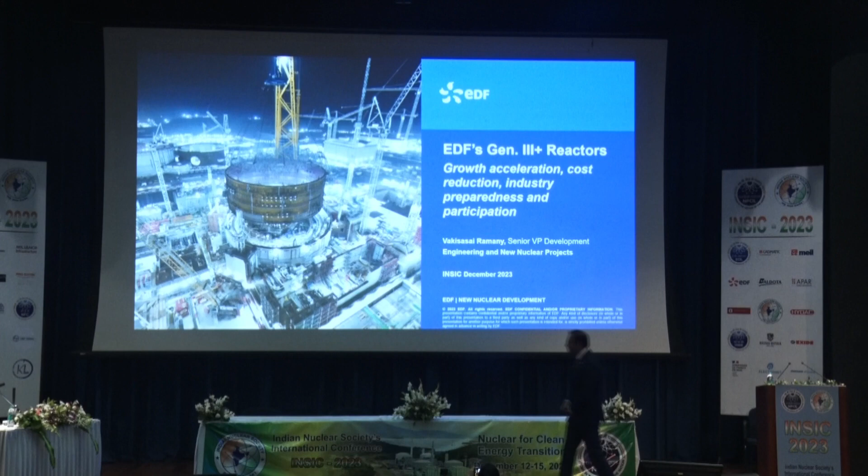And share humbly a bit of our journey in nuclear, which has been lasting for more than 50 years in EDF, and which we expect to continue for many decades. I'm sure you've shared here all the positive perception of nuclear, which is back in the game now, in the center of the game with the COP28. And so I think we all have to play a big part in this, and we look forward to getting India accelerating and showing the world how fast and great nuclear can be for the future of this country.

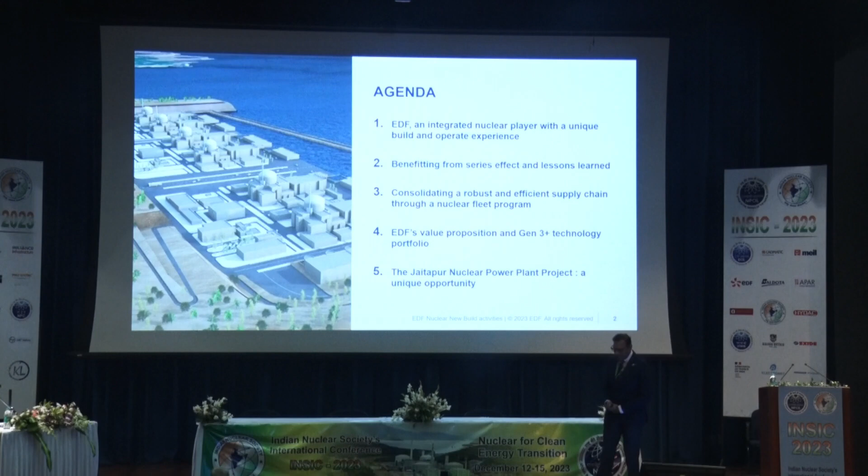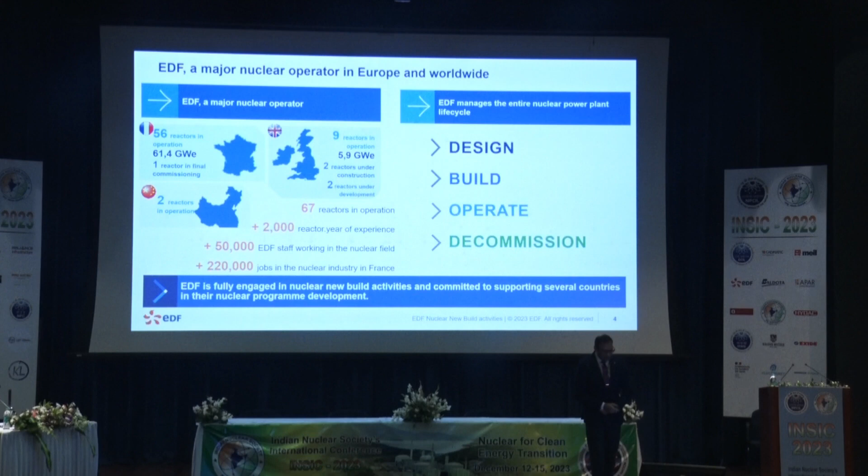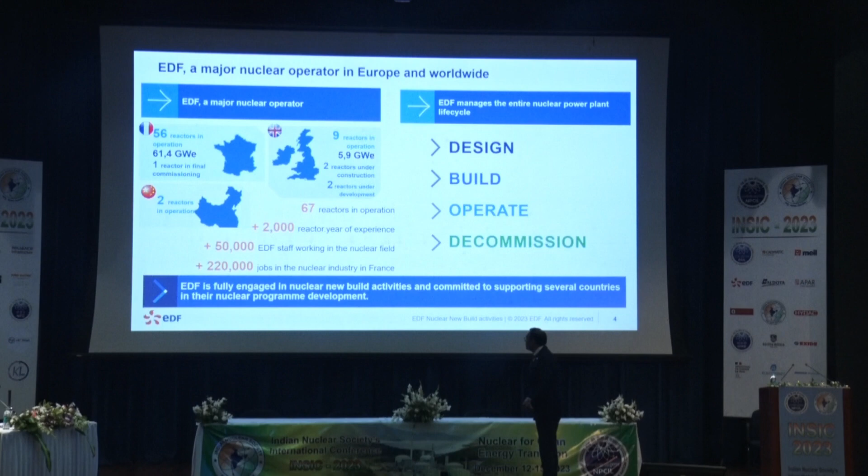So maybe you've been very kind, sir, in saying that EDF doesn't need introduction. Still, I will maybe explain where we come from. Today, EDF is, as a single company, the world's largest operator. I think probably in some years we will be overtaken by some big Chinese company. That is to be expected. But so far, we are the largest world operator as a single entity.

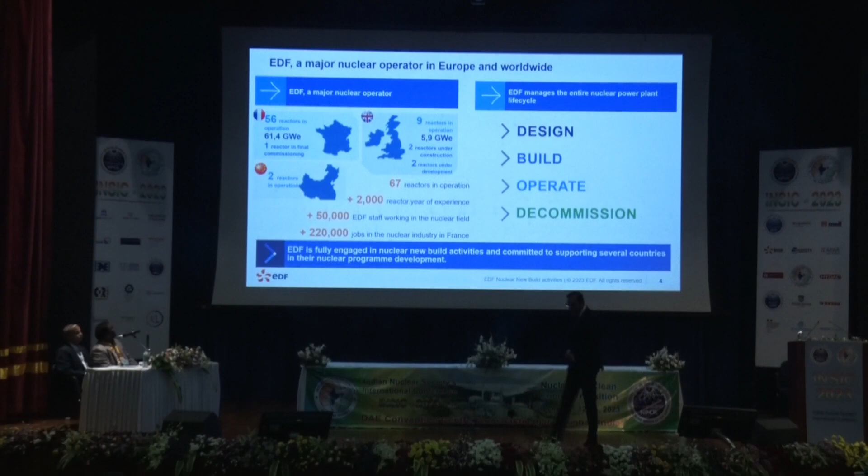We've got 56 reactors in operation in France, 9 reactors currently in operation in the UK, and we do contribute to the operation of 2 reactors in China. We count our experience, just like we all do, in terms of reactor years. So we multiply the number of reactors by the number of years of operation, and that gives us more than 2,000 reactor years of experience, which means that a country like the Netherlands, which has 1 power plant, would take 2,000 years of operation of that single plant to get to the same level of experience. That is not to compare, but essentially to say how much there is to learn.

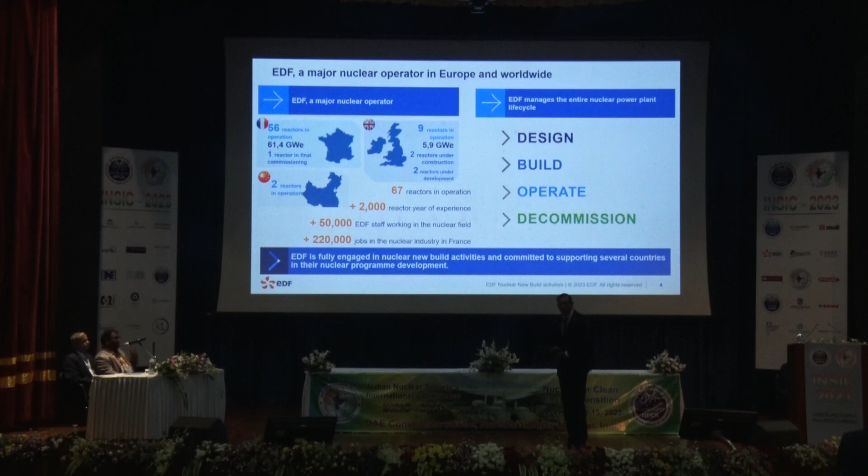And you probably know, we have been through very difficult phases and experience last year with our fleet. And I think this is a reminder that whichever stage and maturity of development you are in, nuclear is humbling as a whole. So we are present with all this experience in design, build, operate, and decommissioning today. So we are present in the full value chain of nuclear.

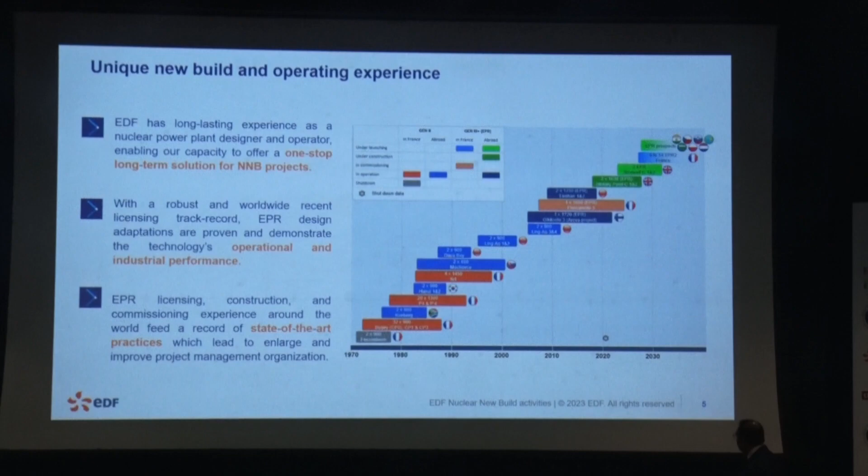How did we get there? It's been a long history, and I think it's best pictured by this graph. We started in the 70s based on two things that happened. There was the oil shock. France is actually geographically a pretty small country and didn't have any natural resources. So the government had to take dramatic action, and they took one bold decision to build significant nuclear capacity in France. It started with Fessenheim with 2 900 megawatt reactors, and then we had 32 additional reactors of the same kind being built in France.

It's fair to say that these decisions were made before having a clear picture of how much it would cost and how much capability we had to mobilize. This is a very important element. So the one thing, and I was sharing with my good friend Mr. Arun Naik earlier, one big difference I would say between France and India is that the decision-making process involves a go decision before you have all the parameters of the program. This is true also today.

As we launch a 6 EPR program, the decision is made before we have the full cost and all. But the industry then gets prepared and comes up with a full proposal aiming to be the most economical at the end of the day. In India, there is a logic to challenge the industry through the process and then make a decision. Comparably, through this process, we get to a significant number of reactors built in France. Comparatively, let's say, maybe India could look at other ways and other processes. This is just food for thought for the rest of the journey.

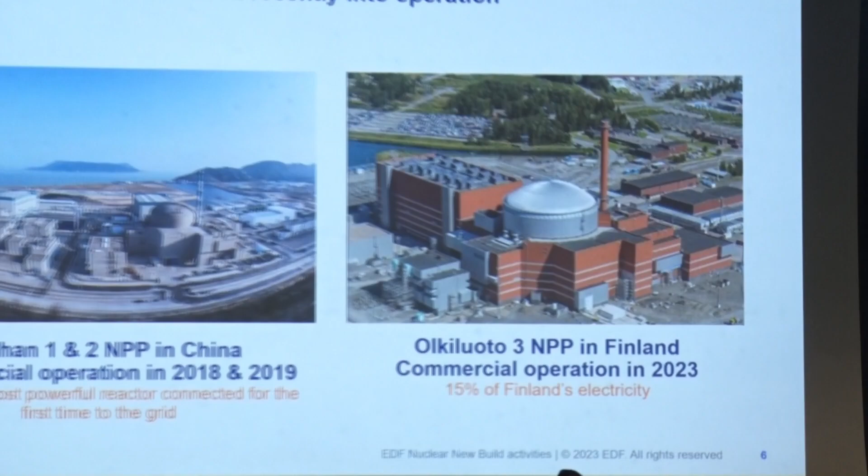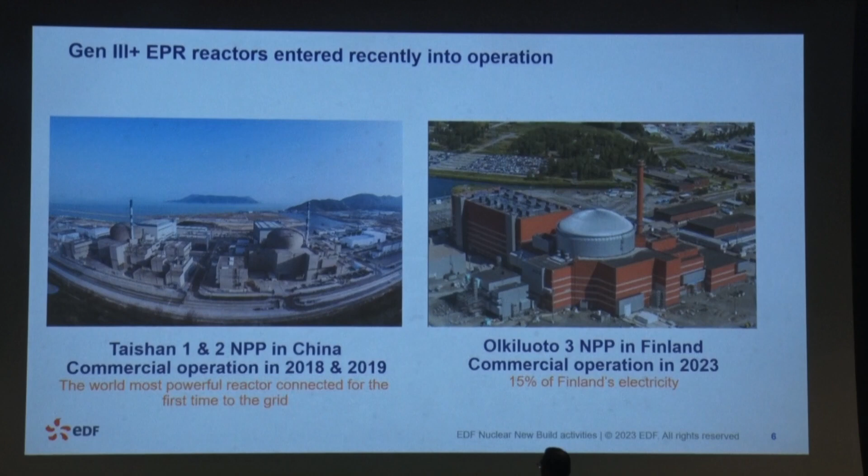We are, I would say humbly, at the beginning of this journey, not even in the middle, but we have great hopes to improve this situation. This is what we have achieved so far. I would say not easily. So we have many of our own scars on these programs, but we have completed the Taishan program in China, and we have successful operations for 2 EPR reactors of generation 3 plus today. Both of them are up and running nowadays.

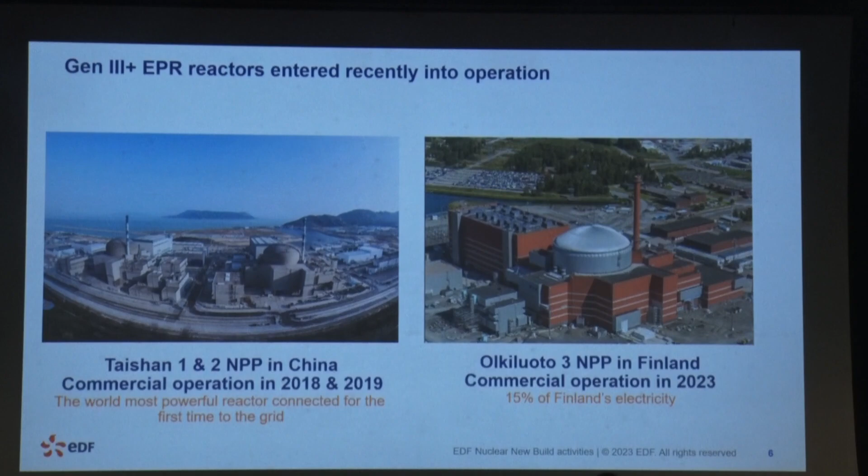Finland, Olkiluoto 3, finally now is up and running. It's difficult to compare the situation. This was meant to be a single unit, not a twin unit, which in its own right is part of our lessons learned. We would avoid single unit programs, and rather encourage at least twins and even more to have a significant program effect.

And Olkiluoto today is providing 15% of Finland's electricity. For those who don't know Finland, Finland is a very industrial country with a lot of high power intensity, power savvy industries like paper, and also metal and all other related industries.

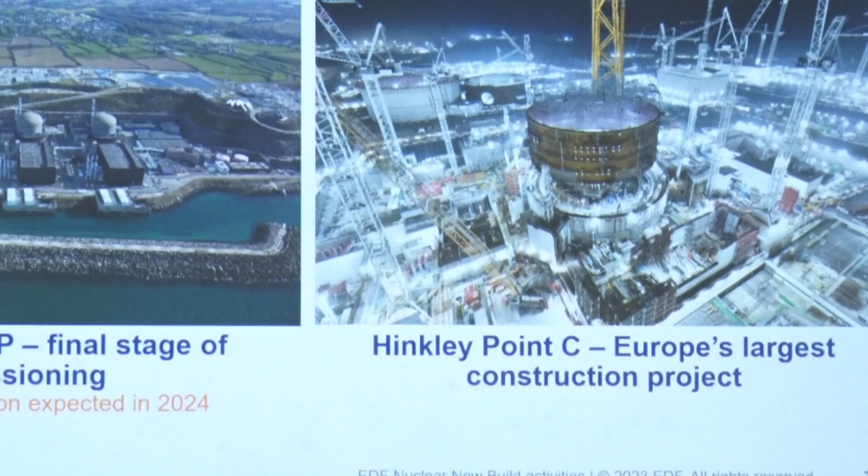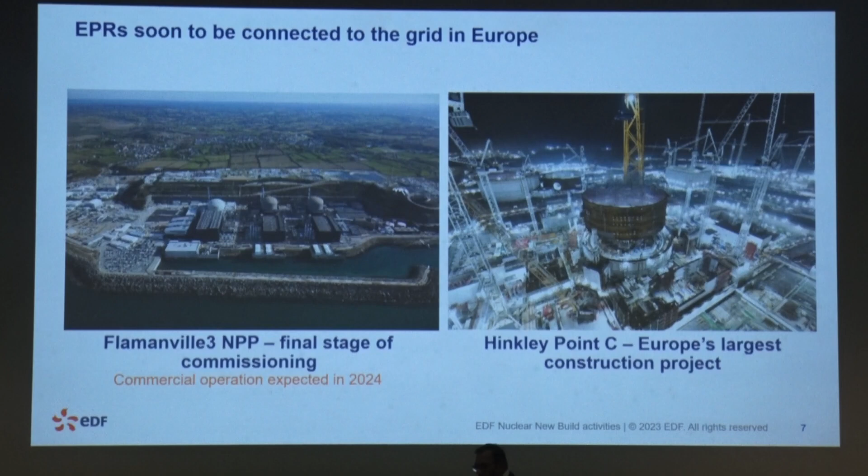In France, we are very soon to complete the Flamanville 3 EPR program. This was another single unit program which we definitely don't want to replicate. We're going to go for series. So here in France, there are 3 reactors on the site. These 2 are reactors of generation 2, and Flamanville 3 is here. This is the generation 3 plus reactor. We expect to fuel load early next year and get into commercial operation in the course of next year.

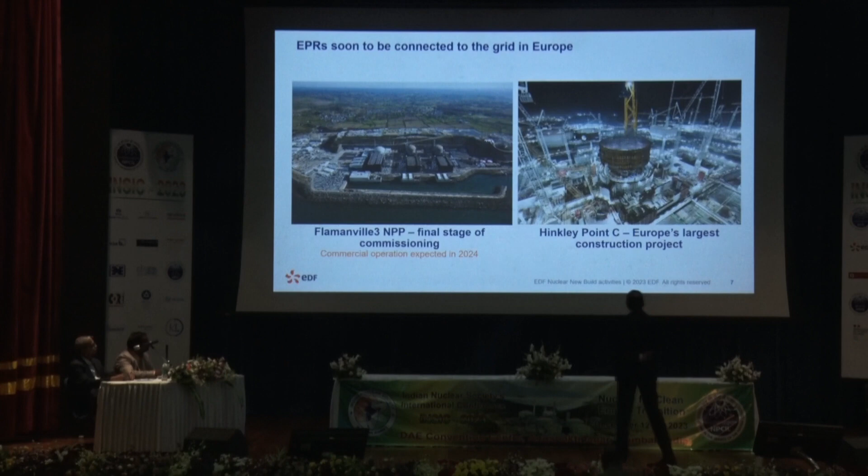What you see here is a picture that dates almost a year, of Hinkley Point C, which is the construction of a twin EPR in the UK. What you see in this picture is the liner being installed through actually the biggest crane in the world, which we have installed there, which we call by its nickname Big Carl. You can see it in yellow here.

In this project, we have performed a lot of prefabrication through our experience learning. I will come back to that, which has allowed us to completely integrate lessons learned from previous programs and accelerate construction. I don't have the picture here today, but we are to put the dome by the end of this year. So this is in a few days. The dome of the reactor will be up there. So that's to give you a picture of who we are and where we are today in generation.

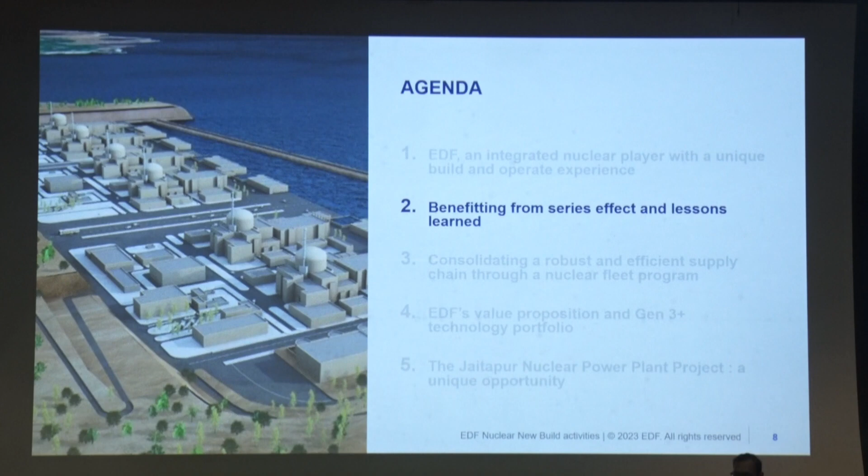Now, of course, the objective, because this is the theme of the presentation, is how to grow, reduce cost, do it successfully, repeat. So, two aspects I'm going to develop in the next section. One is related to the benefit of the series effect, how important it is to have visibility on a program to be able to plan and ensure that things can improve over time. And second, of course, to make sure that this happens, specific processes related to lessons learned. So, a bit of the theory which is verified by experience.

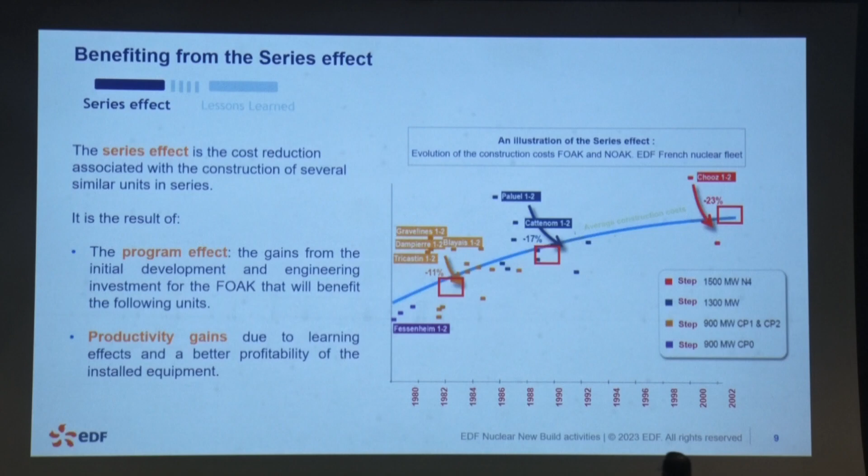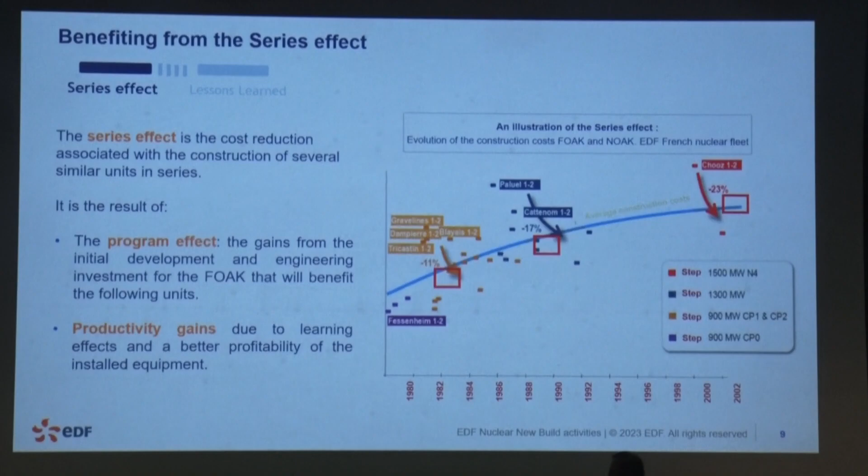So this is the curve of how things have evolved in France, and how we've seen the construction cost evolving over time. Of course, what you can see here is a progressive increase, but at the same time there's quite a lot of variability, and also it's not linear, and you manage to actually get to a point where things can be fully put under control. Now, why does this go up? It's because we're moving from generation 1 to generation 2, and the level of complexity increases significantly.

But the reason we managed to get some improvements in the numbers and the learning is that first we make sure that we benefit from what we call program effect. So we plan as a program, we can procure as a program, we can leverage engineering and developments across a fleet, and secondly, of course, there is learning through productivity, and this is something which I would say is by the book, something that you would see everywhere.

Maybe some concrete numbers. If you look at the program effect, and we now consider the program not on a single country basis, but on a worldwide basis, when we compare Olkiluoto 3, which is the first EPR which started construction, with Taishan, we've been able to cut the number of engineering hours by 60%.

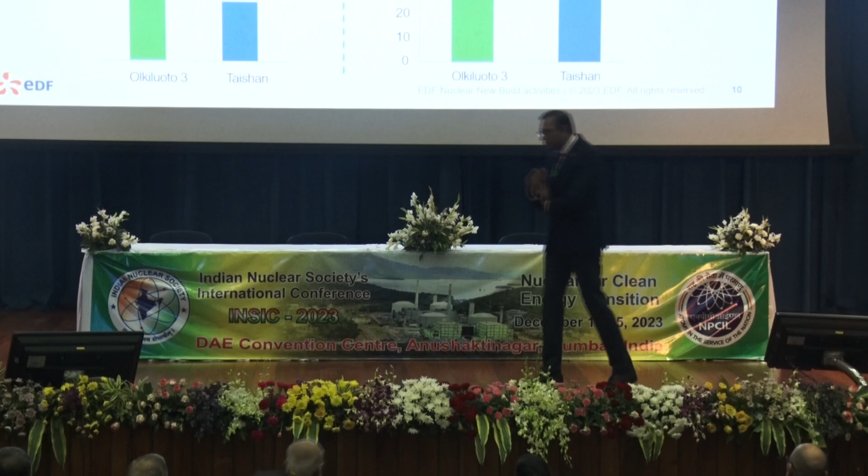This is the capability of using a number of detailed design elements in the drawings of Taishan. Manufacturing itself as well, Olkiluoto 3 could be considered the first of a kind. And when you look at steam generator manufacturing, we have been able to cut the manufacturing duration by 2 years from one program to another.

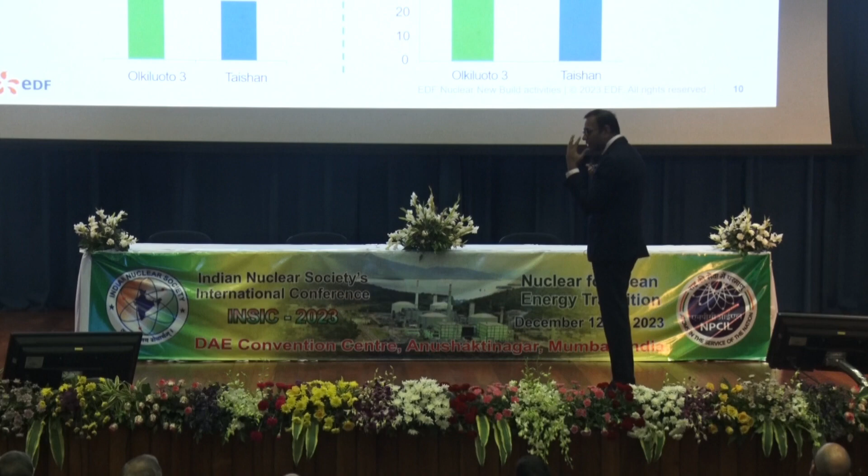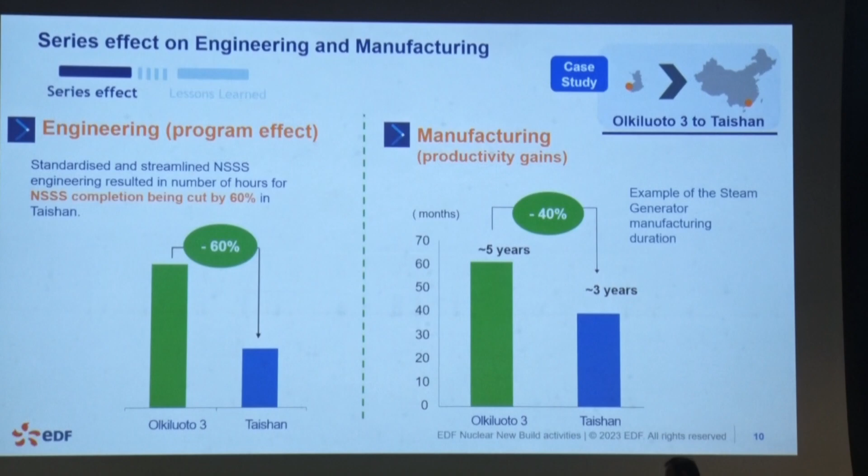And this is important in the sense that, bear in mind, this is just the beginning of the journey. We're very far from having fully industrialized all these processes. The reason why is currently, when you look at the different EPR programs, the first EPR was decided for Olkiluoto in 2003. The second then for Flamanville was decided in 2004, but the pouring of the concrete was in 2007.

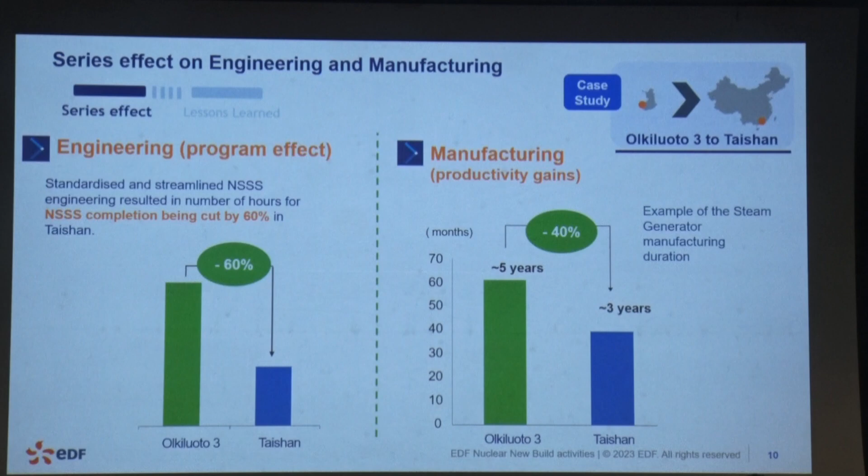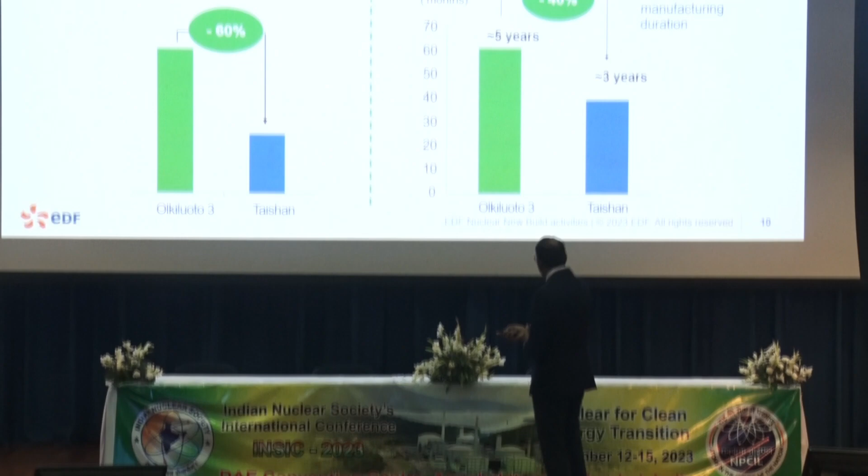And Taishan was decided in 2009 and pouring of the concrete the same year. Then we had a huge gap, and we had to wait until 2016 to have Hinkley Point C decided. And so those significant gaps didn't allow really the industry to fully organize itself. So lessons learned have been happening, and we can show these numbers, these figures, but we don't have the full effect of those yet.

And this is why, considering the future of the nuclear program in France, we're encouraging the government, and the government has decided to make a 6 EPR program decision in one go, and that was decided in February 2022. I'll come back to that. Series effect, other examples, replicating the design. This is going to happen in the UK. So the Hinkley Point C design, for which I've shown a couple of pictures, that design is going to be replicated exactly at Sizewell C.

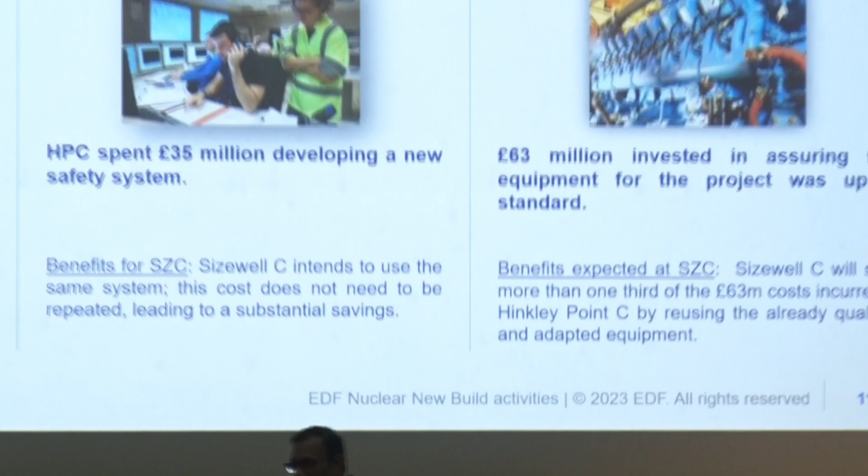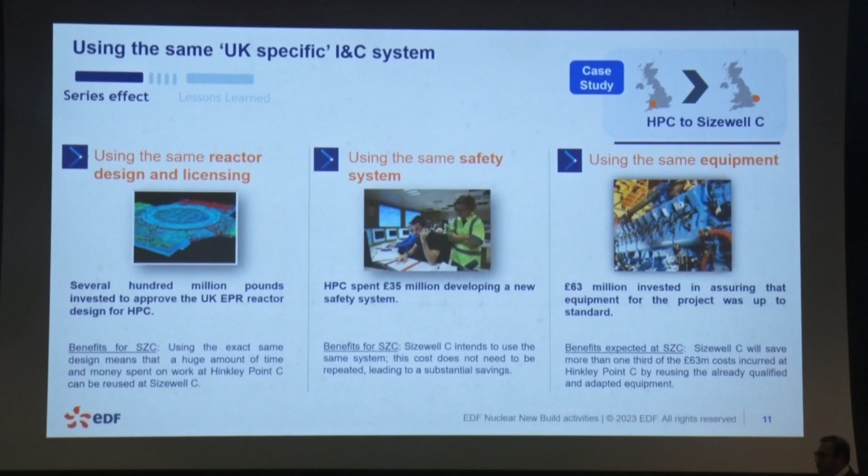Because the UK has its specificities, it's got specific design elements, just like India AERB is requesting some, or say AERB rules require some adjustment. We have seen the same in the UK. Those do have a significant cost, and in the case of the UK, that was several hundred million pounds. And of course, being able to completely leverage that for a second program is very beneficial.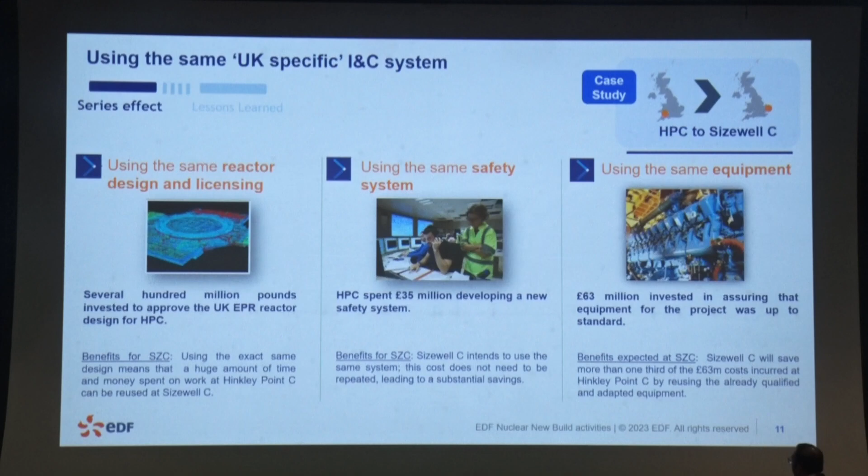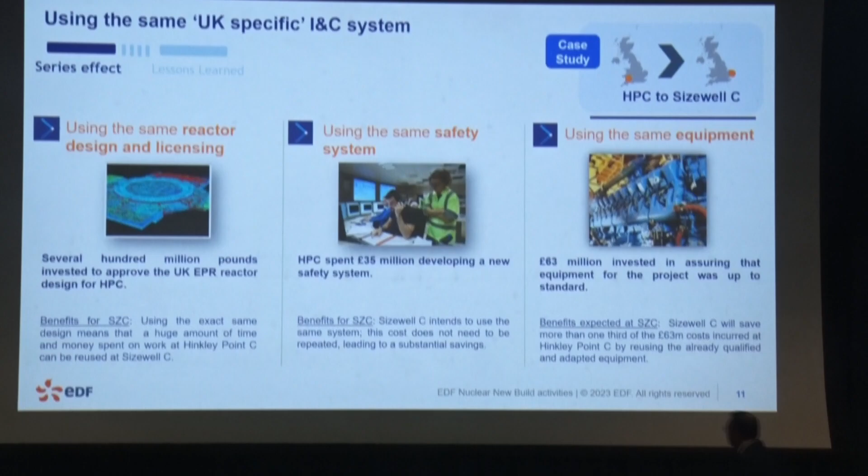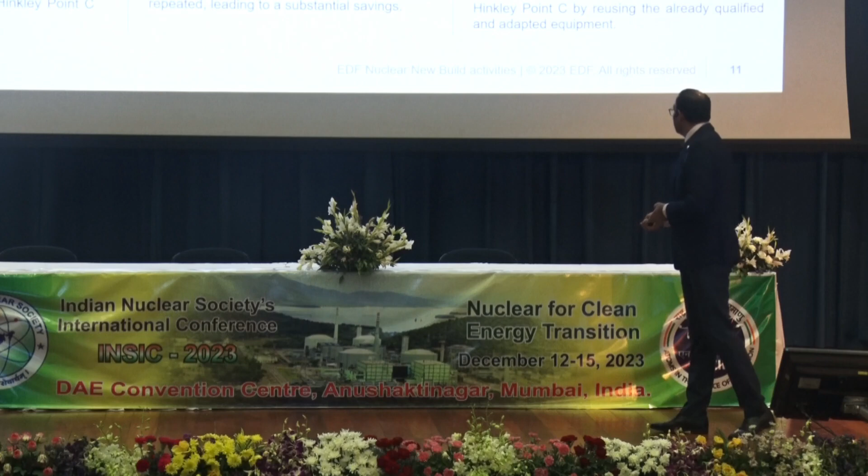If we take other very simple examples, even if the numbers are much less, still, they are big numbers, but not hundreds of millions. Safety system, full replication, and 63 million invested in the equipment standards and the tools. Those effects you can see clearly in the pricing of the different programs.

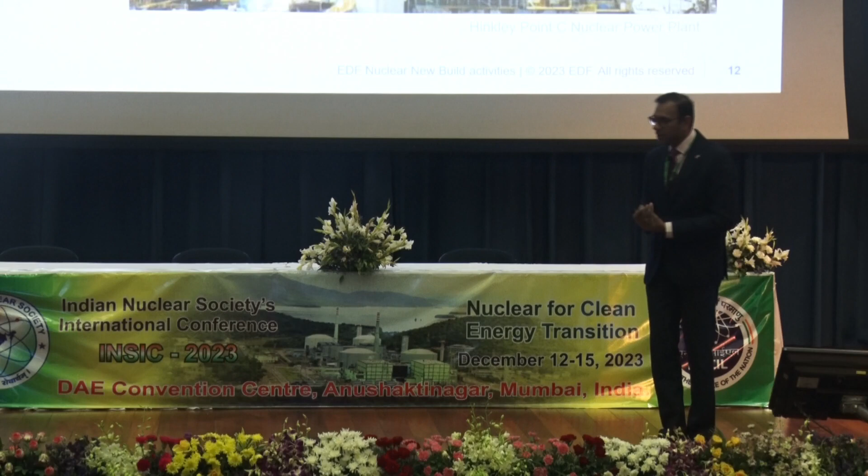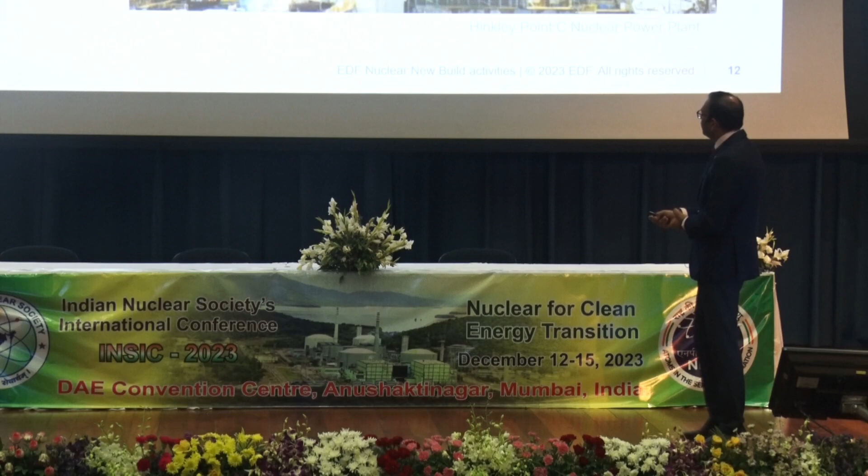Some practical examples of construction. I'm sure you have seen this happening also in India in your PHWR programs, including also certainly in Kudankulam. So we measure those and we try to keep track of these. So at Hinkley Point, when typically we look at the liner cup floor, it took us 57 days to build and position, and we had a 30% time gain for the second unit, which is just next to Unit 1 at Hinkley Point C.

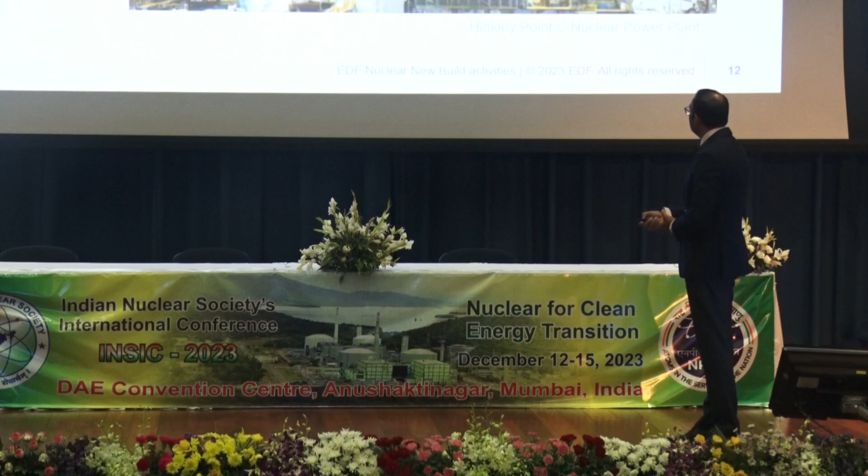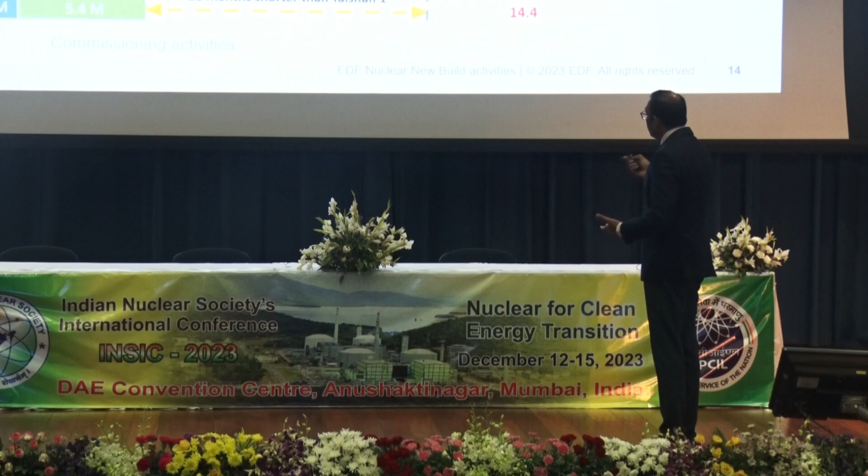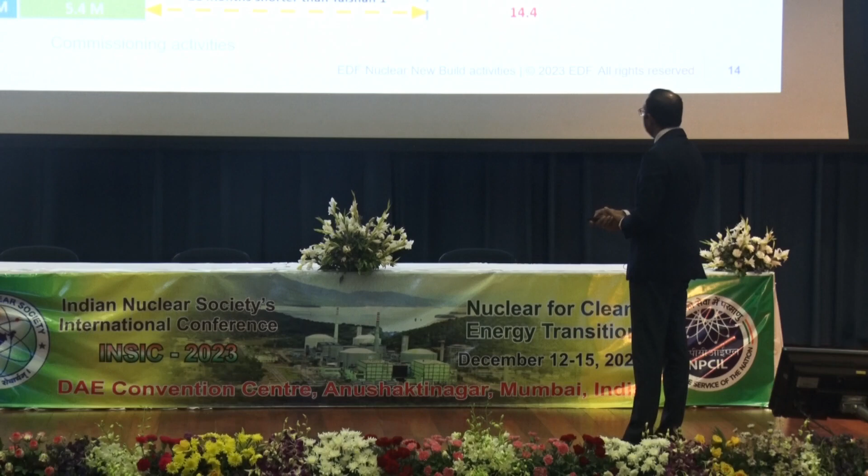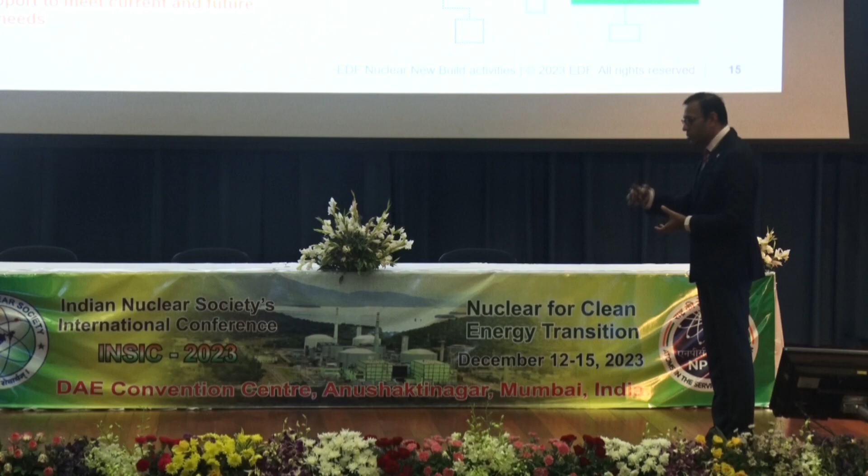All of these we make sure that we integrate as lessons learned. And what is something very specific to EDF, I should have mentioned earlier, is EDF's ability to develop partnerships in the very long term and keep cooperation live and very active over decades. This has been the case in South Africa, where cooperation is still ongoing, with the current steam generator replacement ongoing with the support of EDF at the Koeberg plant, and of course a lot of sharing still happening with our Chinese colleagues.

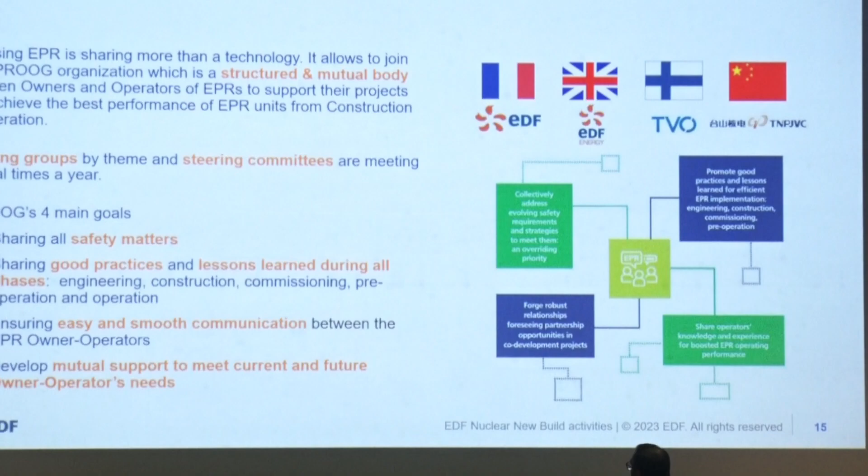So what we do for Generation 3 is, at the very beginning, already in 2015, we set up what we call the EPR Owners Operators Group, where we expect to find all the EPR programs gathered.

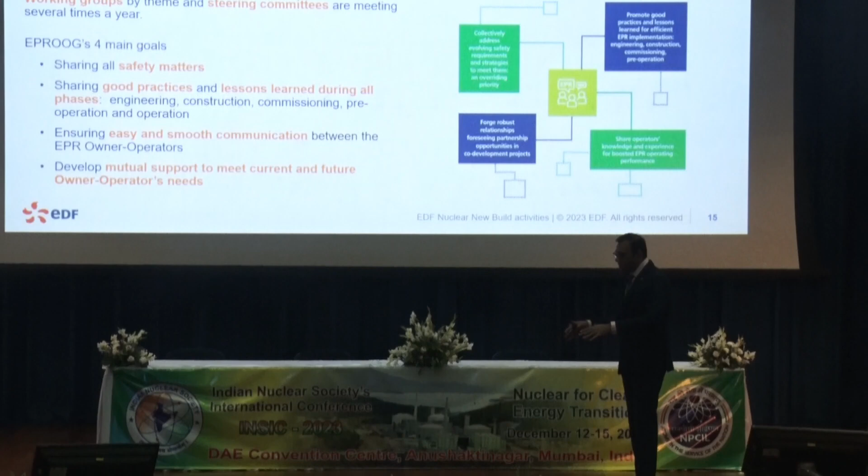This is not only a service, but it is also a discipline for us and for our partner colleagues from the different programs, and we obviously hope to add more as we move forward. This is about sharing all about safety matters, so improving safety performance, sharing all good practices, lessons learned in all phases of the project life cycle. There is a network of communication which is very fluid, and people do know each other and meet at least once a year in a full gathering.

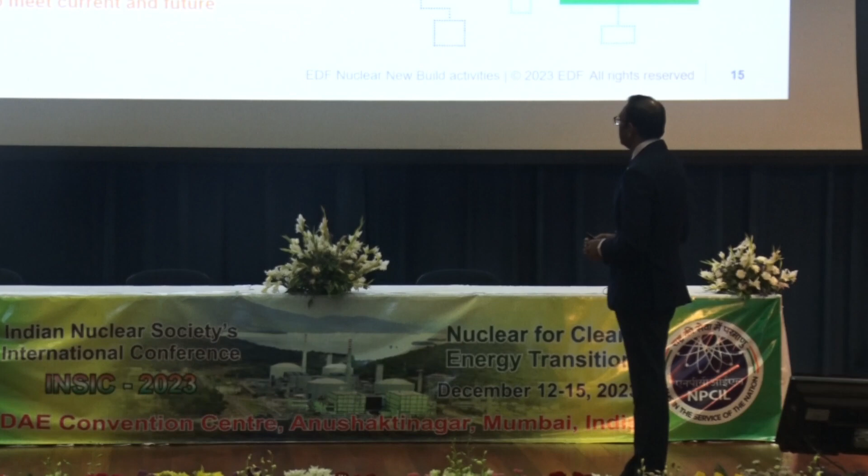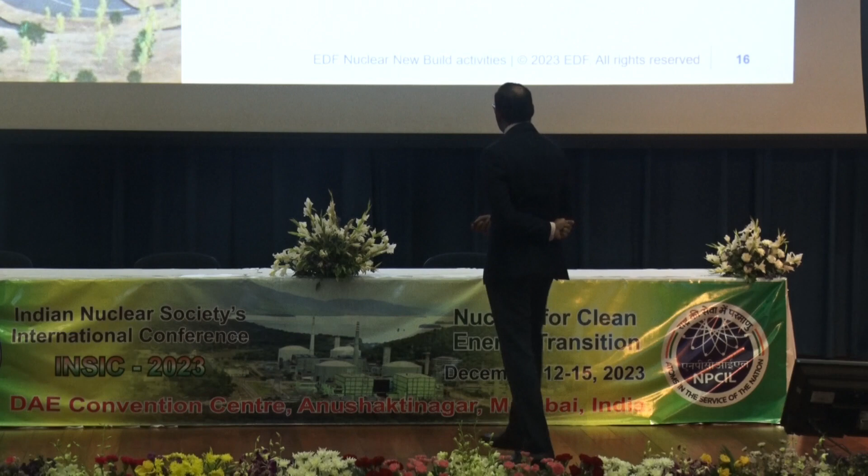We are developing currently mutual support, including for spare parts for these programs which are spread across the world. Now, all of that, if we are to look forward, we have to make sure effectively that it rests on a very robust supply chain. The difficulty with the supply chain, in my view, is that these are partly partners, but they also develop their own business. And of course, they have their own decision-making process. And just like we do as integrators of programs and as future owner-operators, they have their own expectations for efficiency, return, and all of that.

Now, the key for the whole of programs to effectively be delivered and be delivered efficiently is visibility. And it is what I would say currently we have not been very good at providing. And this is true of all governments around the globe and of all integrators around the globe. Providing visibility is the key to ensure the alignment of the supply chain. For me, this is very much like a magnet.

You have to put the magnet in place for the needles to align. Otherwise, you can have as many needles as you want. It will never align. So that's what we need. We need to put the power on so the magnet effectively is active and the needles do align. That's what I call visibility.

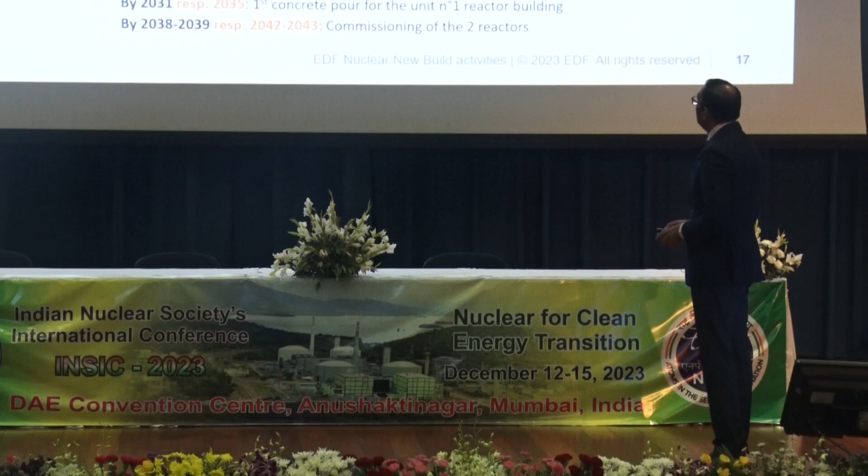Now, in France, we are in the stage where the politicians, the government, has fully realized the importance of visibility, and the decision now has been made to build at least 6 EPRs, and government has decided to consider also 8 more. The good news is the 8 more is this time coming from their own suggestion. It's not EDF asking. This is now French government saying maybe we should consider 8 more. And of course, what we see happening in France now is the whole of the supply chain behind EPR, which is a European supply chain, is making investments, actually going through what we call ISO 19443 certification, which is the certification for nuclear. And many of the companies are performing that.

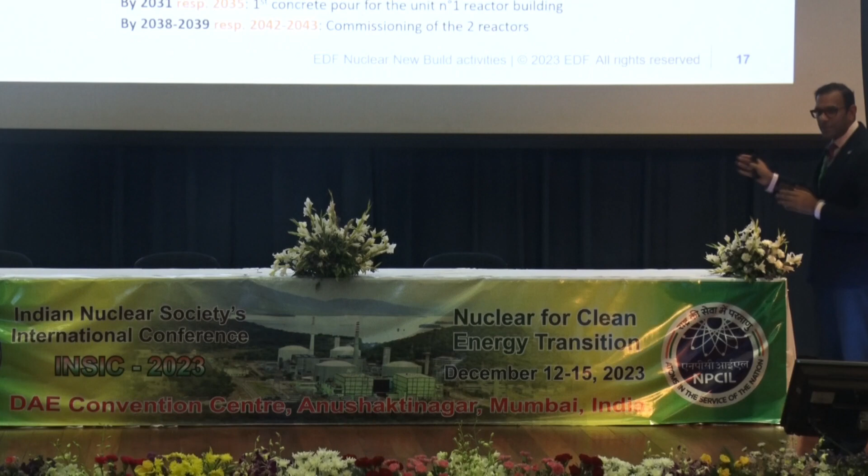To give you a very simple figure, I don't know how many of you know about ISO 19443. I know L&T people know about it because they have been certified recently in the course of the year, and they've done that with us encouraging them. But in the world today, the latest figures I've got date from last week, there are 161 companies certified with ISO 19443. Out of those 161 companies, 120 are French. Direct visibility. If we aim to provide visibility elsewhere, definite assurance that everybody will align. So this is a very concrete example and I think useful.

Now what's interesting in what's happening in Europe is that energy crisis, climate change, necessity to improve energy independence and security of supply. A number of other programs are progressively being confirmed. And as EDF, we are being solicited, so there's no guarantee we'll be building all these, and there is also competition at play. But clearly, EDF's experience, especially in building Generation 3 in Europe, and today EDF is the only player constructing Generation 3 reactors in Europe. So EDF is solicited and expected to participate in these processes and support these programs.

Overall, when we look at what's being accelerated in Europe, and I'm talking about typically the Netherlands having voted in Parliament a 5 billion euro program, Sweden having voted in Parliament a 35 billion euro program, etc. Czech Republic in the middle of a tender process, which we participated in, for up to 4 reactors in the country, and we have many of those currently happening in Europe. Overall, we look at the perspective of 30 EPR projects around the globe. I'm, of course, counting very much on a decision in India for 6 EPR as well, with our partner NPCIL.

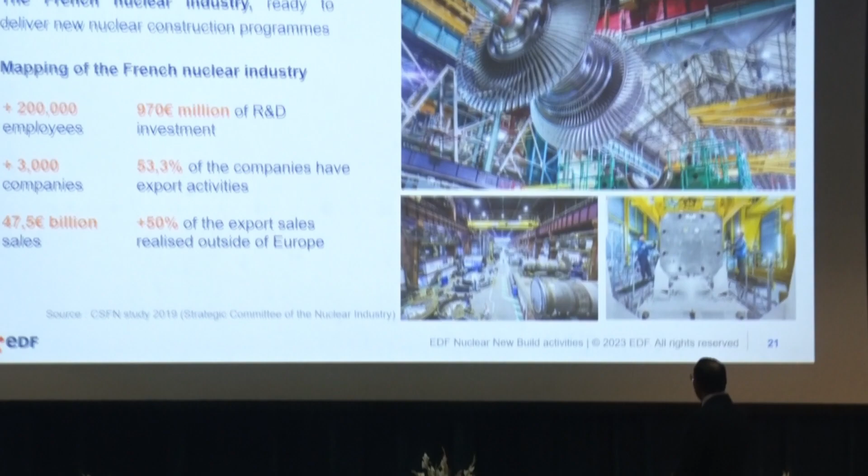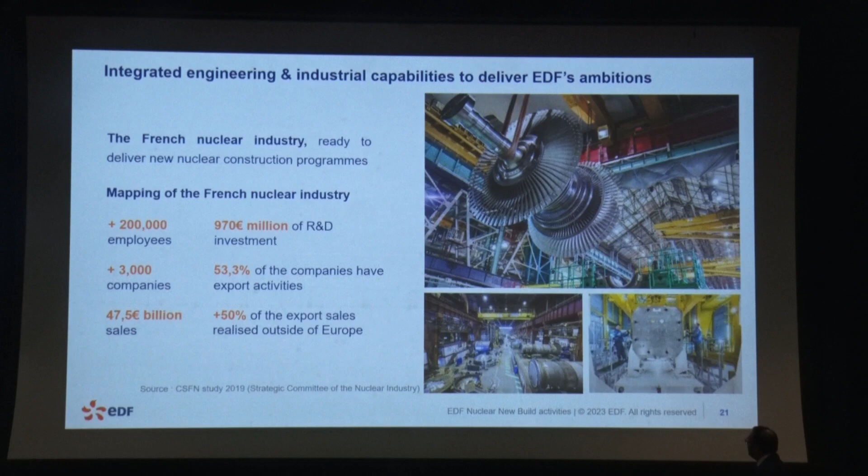So now these are a few pictures of how much industrial activity we have accepted to integrate and looking to integrate within EDF. So soon we expect to add in the integration list what is currently GE, but what are effectively the turbines, the Arabelle turbines, which are today the most performing turbines in the world, and come to support various power levels.

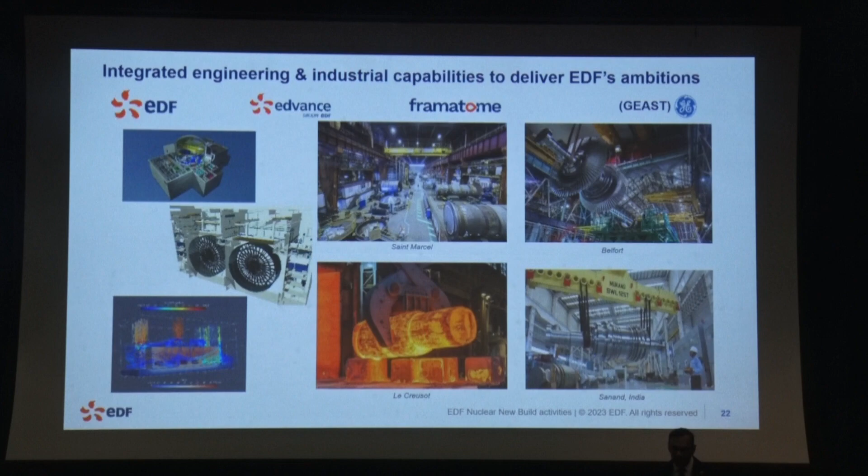We could put the equivalent names in India for these different companies, for forging, etc. This is as if within EDF you had the capabilities of L&T as well as BHEL as well as Tata included. This is what we have decided to do on our side: integrate so that effectively we can have a bigger outreach and improve and streamline the processes, including in terms of decision making.

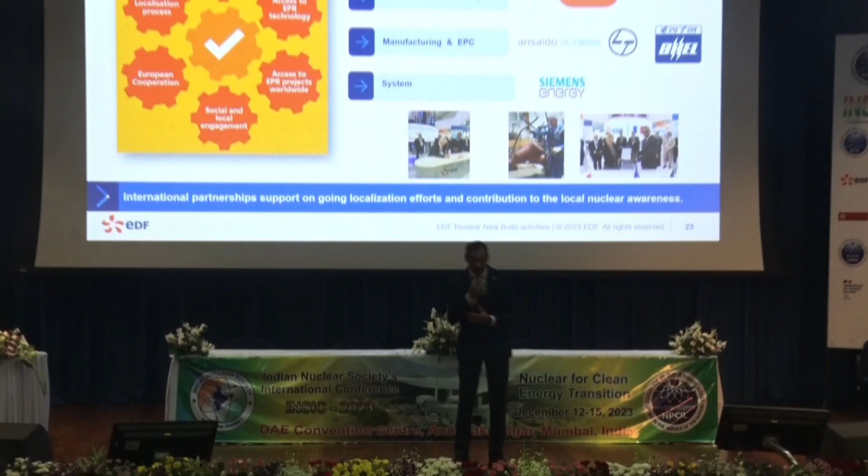Now, beyond the integration, we had to also develop a significant number of industrial partnerships. We cannot integrate the full supply chain. That would not make sense. That would not be reasonable. So we have started a journey of developing specific major partnerships, the first of which were through engineering. Assystem and Egis are two big French engineering entities. They're worldwide companies, and they're actually also very well established in India and supporting us today in India as well for the Jaitapur program.

Bouygues is a major company in France. They're bringing it with us to support the construction activities. Wherever we would be present with programs, they have in their approach to systematically develop a partnership and a cooperation with the best local construction company, so that teaming up can make the whole thing very successful. So, for example, they have teamed up with Laing O'Rourke in the UK. They have been teaming up with Metrostav, which is the number one in Czech Republic, with Budimex in Poland, and so on.

This is a strategic, systematic approach they've adopted. We are developing in the manufacturing scheme some more cooperation. Ansaldo, it's an Italian company. L&T and BHEL, you know about. We do aim to increase those. For systems, we do have Siemens. Of course, we also have internal capabilities through Framatome as well as through GE.

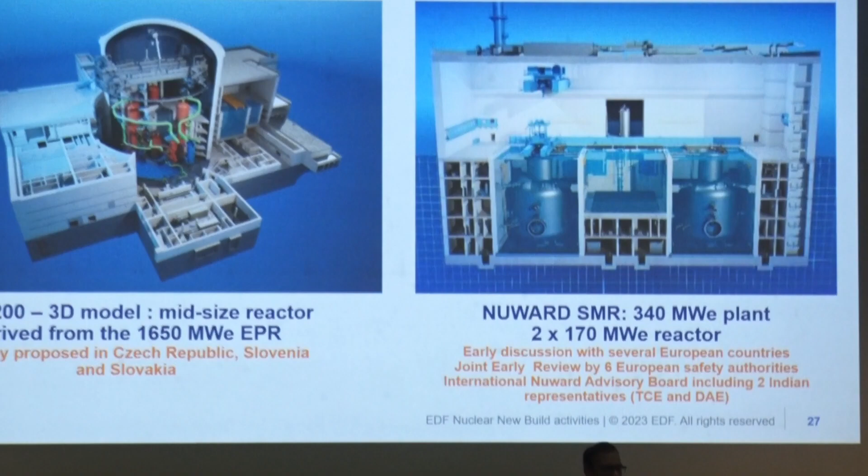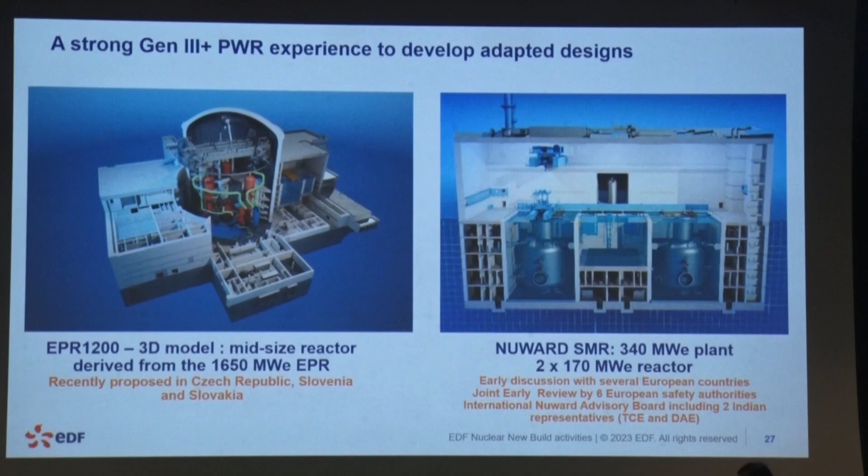For NUWARD, we have gone through a different approach. So NUWARD, this is our SMR. This is composed of 2 modules of a 170 megawatt reactor. Each of these reactors generates 540 megawatt thermal. And for NUWARD, we have taken a classic approach of pressurized water reactor, because we know the principle works, this is our experience. So this is a generation 3 reactor. This plant is supposed to be fully passive in terms of safety. It's got a few innovations inside, especially compact steam generators.

The difference between the EPR family design and NUWARD design is NUWARD is designed to be fully modular, meaning modules manufactured essentially off-site and minimum on-site construction and assembly. Of course, concrete, all of that will have to be poured on site, and it's clear that civil works is the one piece in nuclear you cannot avoid and have to do really on site, but the rest of it we expect to do from factories, and this is what should bring the numbers and the cost down for NUWARD.

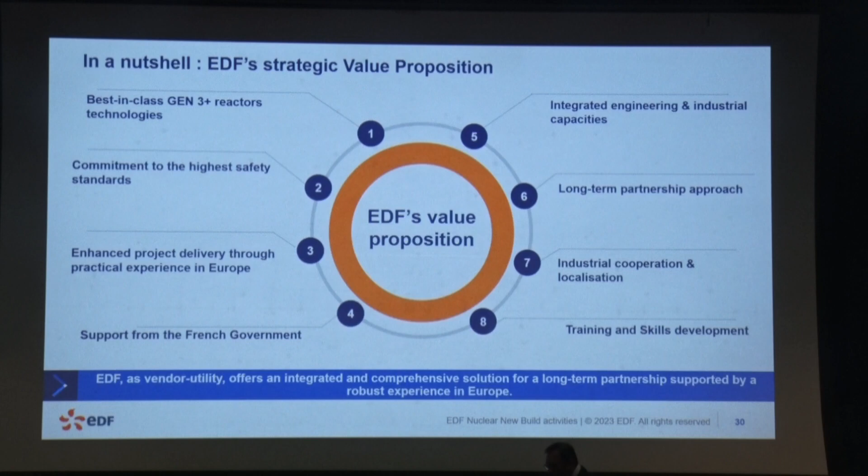As I explained, we bring together with us full integrated industrial capacities and develop partnerships. This is key, especially if we want to project ourselves in many geographies. And we do promote actively industrial cooperation and localization. Training is something which is embedded in what we bring and propose. We start this very early, and we have second-to-none training capabilities in the world.

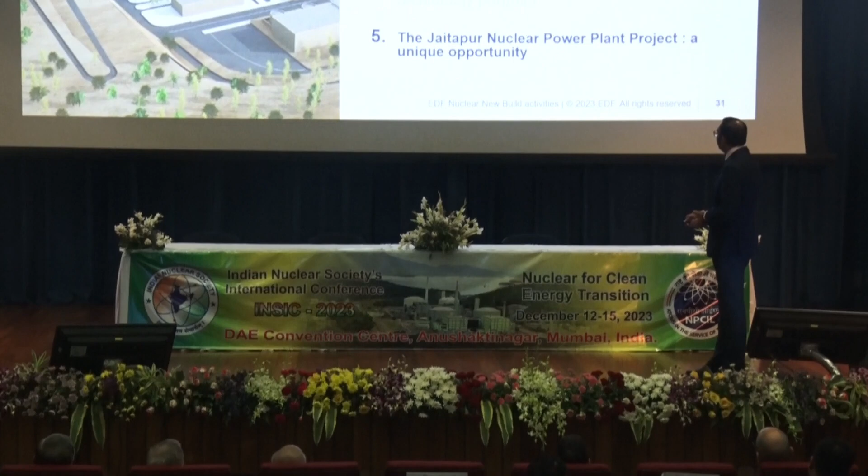Now, I could have developed the case for new build in India as well, but I chose to do it with Jaitapur, as this is very concrete work that we're doing with Mr. Jay Krishnan for many years now.

I'm yet to see Jaitapur in your credentials, because I've seen Kudankulam and all of that, but soon we can add Jaitapur. Thank you. Hopefully, Mr. Jay Krishnan, I hope we'll be able to do that together.

Now, many good things about Jaitapur. It's 10 gigawatts on a single site. If we manage to get Jaitapur started, clearly I think that opens a realm of opportunity for India, acceleration of decarbonization, and essentially a realm of opportunities for the industry.

I do believe that if Jaitapur can go through the decision process in India and be approved, India will not just stop at Jaitapur for EPRs. I think EPRs will have a strong future in India if Jaitapur becomes a reality.

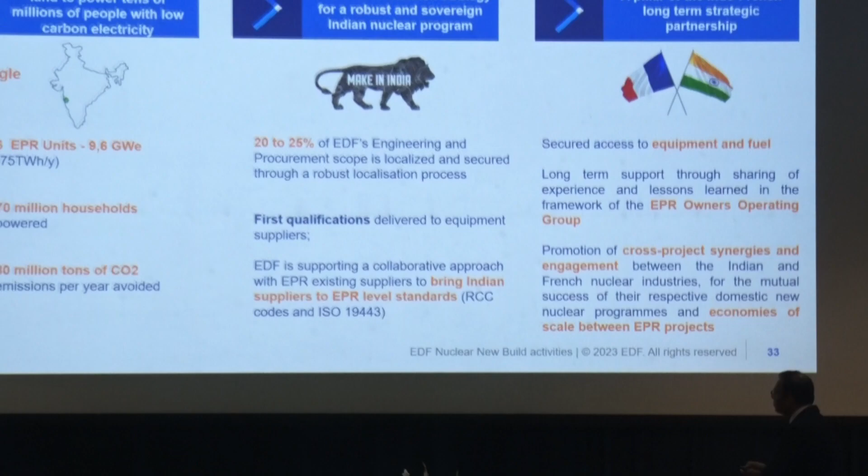As of today, for manufacturing and engineering, we are at the level of 20-25% localization in India, which we believe is not sufficient. Our objective is to increase that significantly. If we include construction, this number would be 35 to 40%, but we believe we can bring the overall number to something close to 70% in India without any difficulty. So this is an area where we will be working a lot in the coming months and years.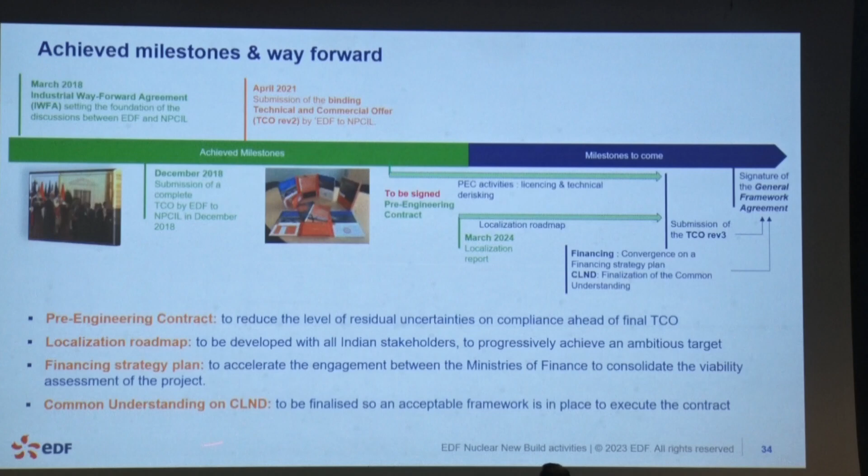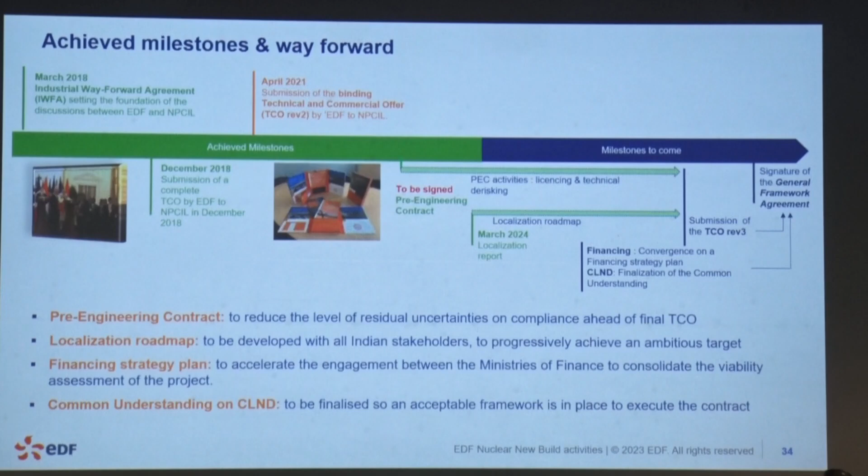Of course, there is very strong support from the governments. What is not said there is why it is decided as a program, two aspects. Number one, we have to make sure we completely de-risk all matters related to compliance, and that is ongoing today between EDF and NPCIL. And second, we have to improve the competitiveness of the overall program, and this will be at the heart of the decision. The key action to improve the number is improving localization, given how competitive and efficient the Indian industry can be.

We have launched not long ago our new offices in Navi Mumbai, and we are to launch early next year an engineering platform in India. This is to support not only Jaitapur but also our other EPR programs around the globe. We do have a lot of expectations of support for our worldwide programs.